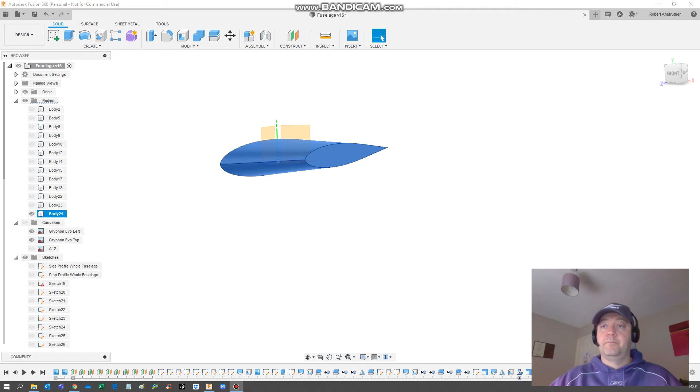Okay, so first thing is we're just going to finish this off. We are going to mirror the bulk of the wing root. So select the mirror plane, hit OK.

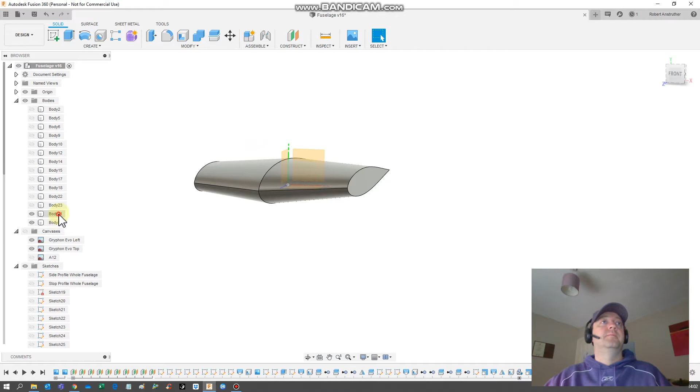We are then going to combine these, join, okay, and then we are going to shell this by 1 mil.

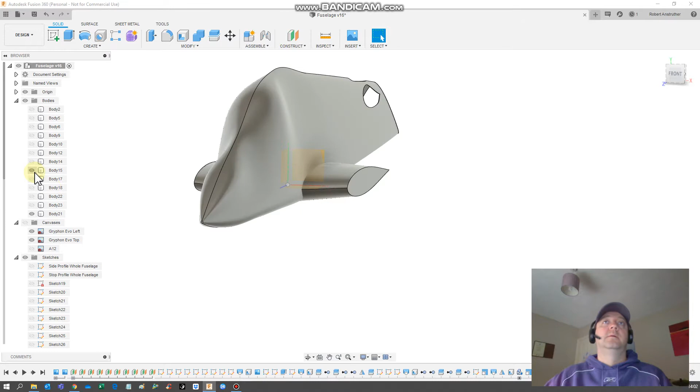Then what we're going to do is the cuts to create our two sets of bodies. So the first one we are going to do is cut the fuse. So split body, the body to split. Always select the fuselage in this menu, because sometimes there's two sides to it depending if you've mirrored it.

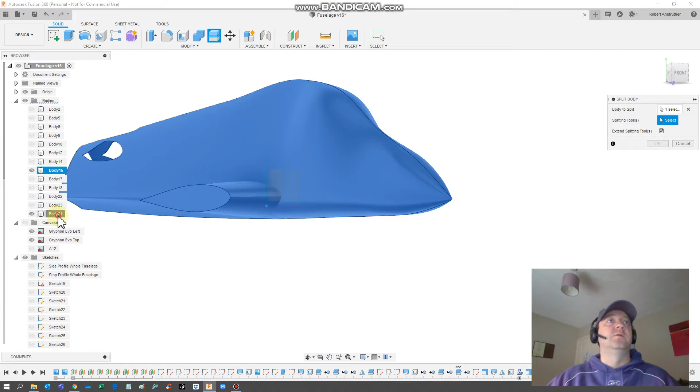Okay, so the splitting tool is body 21. Okay, so again we're going to do another split now, except this time the body to split is different.

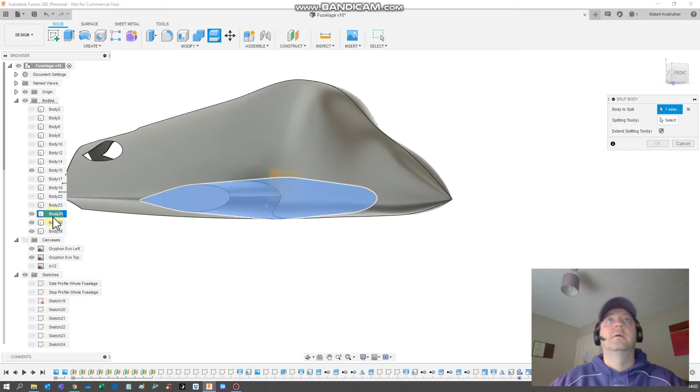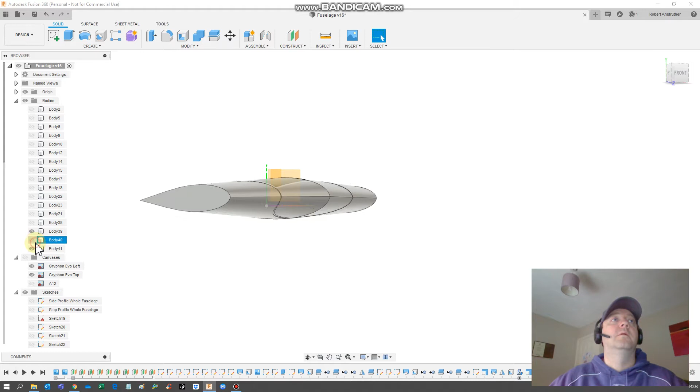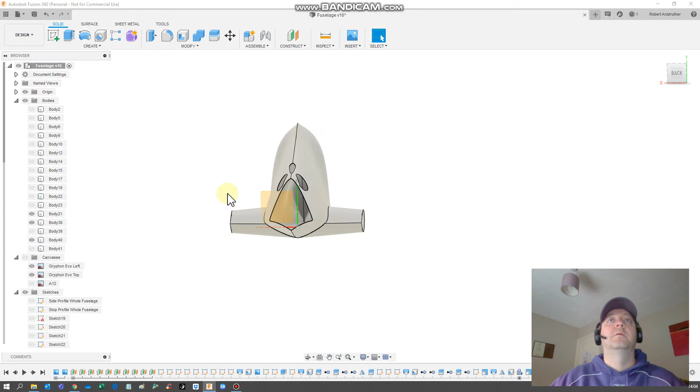Those are the internals, so we can just remove these. And it'll probably get rid of everything else, will it?

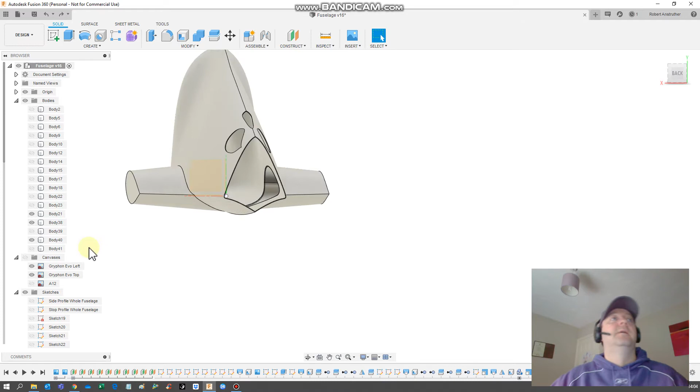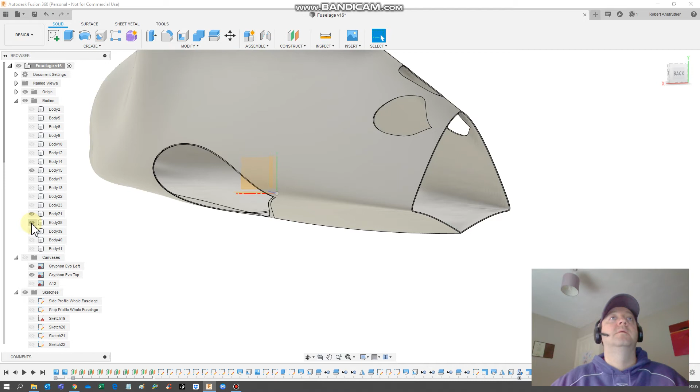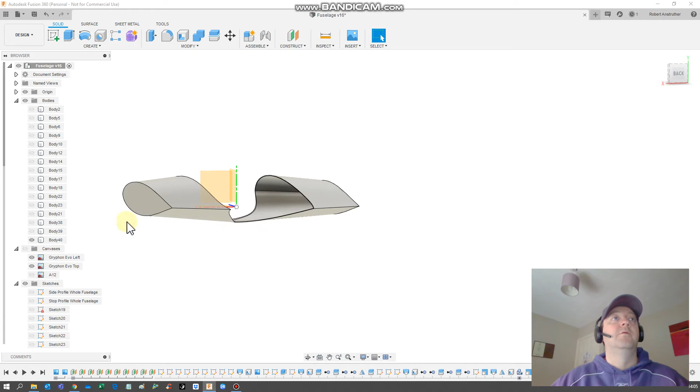Okay, so let's just go through these one by one. Right, that's the cutting part. Okay, so we need to keep that one. We need to keep that one. So let's just, I think we can keep those three. Remove that middle part, we definitely don't need that. That's good.

And the tail plane—those ones can go as well.

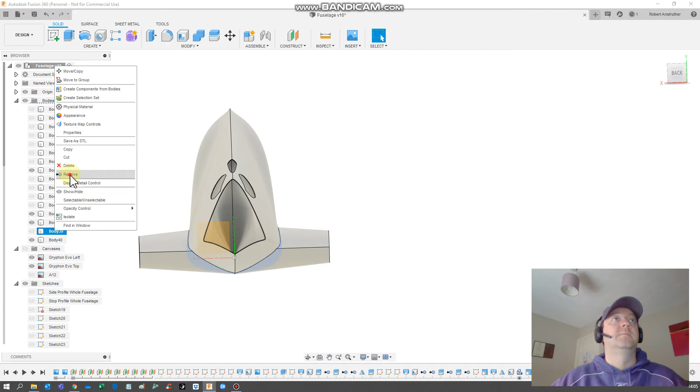And now, if we select this one, this one, this one, this one, go to combine, go join, that should just make one body now, which would be our fuselage, and we'll do an inspect.

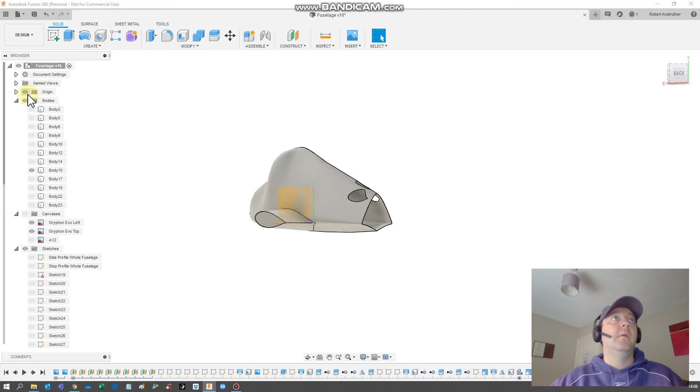With section analysis on this plane, you can go in and actually see now, just like in the fuselage, we've got our perfectly cut out wing roots. There we go.

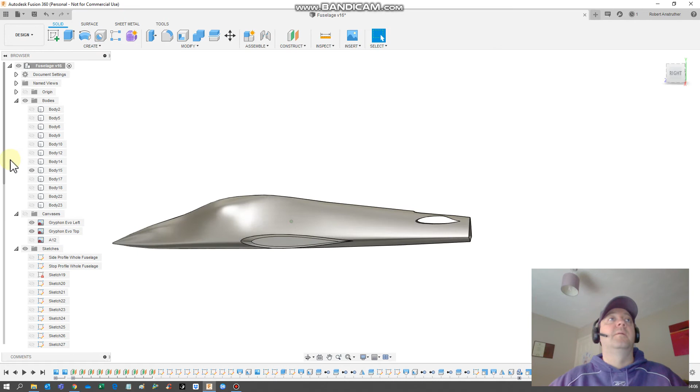So we've now got, oh yeah, we're not quite finished yet. And obviously I'm not going to do it for every single part, but you can join all these together as I've done with the wing root.

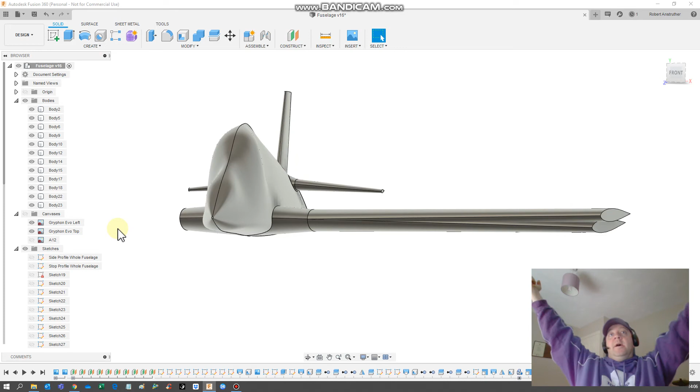You can do this in the tail plane as well. I generally wait till a bit later to do it. I know I've done it here just to show you, but generally wait till later in case you've got anything you want to change or update, because the more final you make things, combining them earlier on makes it more difficult to change them later. It doesn't make it impossible, but it does make it more difficult.

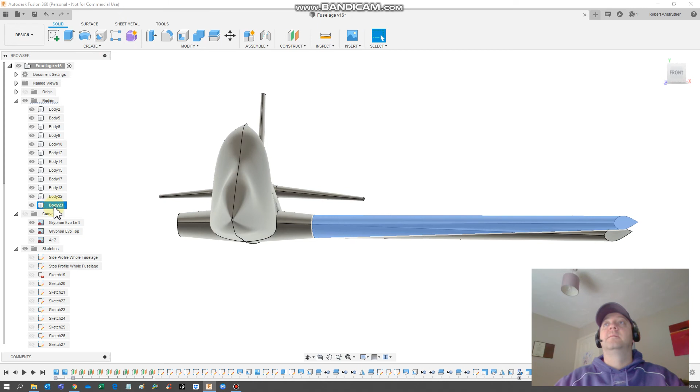So I am going to keep this wing, and I'm going to get rid of this one, so I'm just going to remove that. And then I am going to mirror this one.

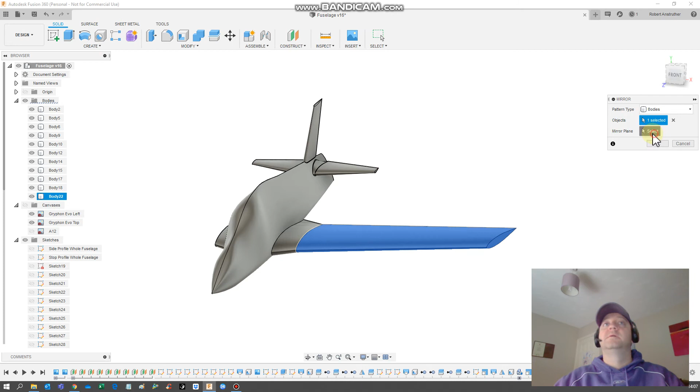Let's go to my menu. That's right, let's do that again. Mirror, select the plane. Okay, and now we've got an aeroplane.

Okay, doesn't look that great, obviously, but the fundamentals are there. Okay, so that kind of concludes the wing part of the wing modeling section.

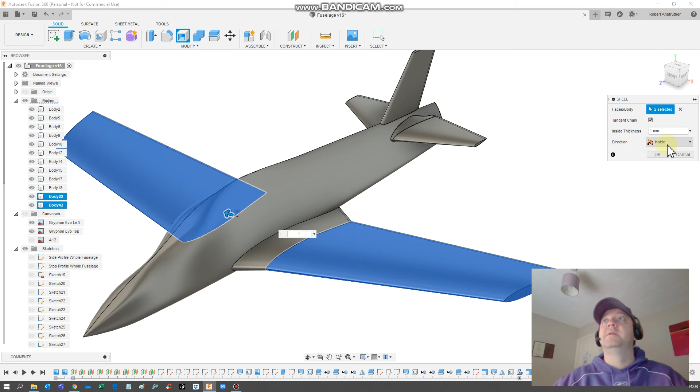The one thing I haven't done actually here is I haven't shelled these, so I'm just going to shell these now. Just give it a 1 mil inside shell. So now we can just do a quick section on here. So you can see that's hollow. Beautiful.

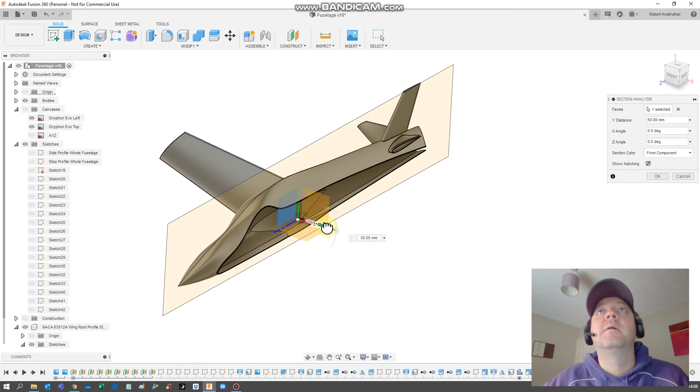Okay, so that concludes. Actually, those were hollow as well, weren't they? Yes, they were, and so is the rudder or the vertical stabilizer.

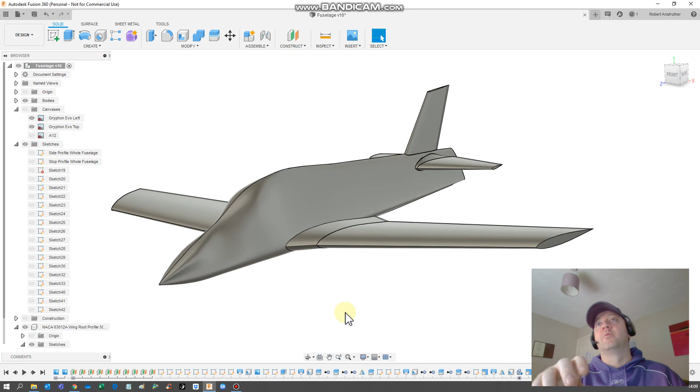Okay, so next we're going to go into the next part, which will be the last part of the core surface modeling: the air intakes. And then once we've done the air intakes, I'll do a short video about what the kind of steps are next after we finish this, because after we finish the core modeling, we go into some other areas. But I'll talk about that in the next set of videos anyways.